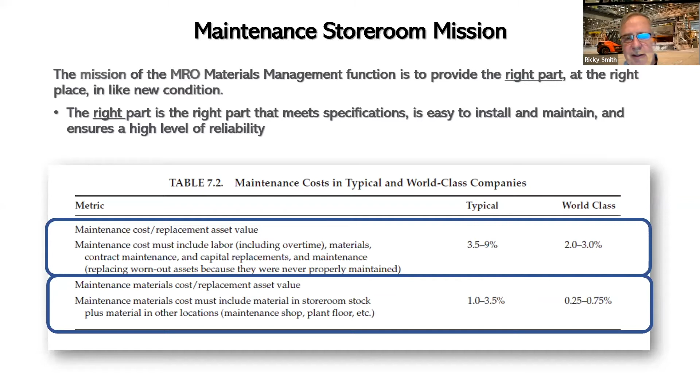We go to world class, it's 2 to 3%. So that means you're spending a huge amount of money if you're typical compared to world class. Okay. Now let's go to spare parts. Material cost as a percentage of replacement asset value, 1% to 3.5%. And look how low this one is, 0.25 to 0.75%. It's massive. It's a massive amount of difference.

So let's just talk about some of the symptoms of an ineffective storeroom. These pictures are actual pictures I took in a storeroom, not this week. The environment parts and material are kept in does not meet the requirements of the manufacturer. The manufacturer says a V-belt should never be hung straight down. It should be rolled up and stored on a shelf. So do any of you have that problem? Do your belts, your timing belts and your V-belts just drop down on a loop, hanging in the storeroom? Anybody?

We got a couple answers here. It says, pretty sure all of our warehouses have V-belts hanging on pegboards. Yeah. Every one of them, LOL. Read the manufacturer's recommendations. I know they want to sell you more belts and you're helping them out a lot, but we've got to look at what is best storage practice. They should be rolled up on a shelf.

Okay. The environment, you don't want the humidity too high, too low, too hot. It needs to be controlled. That's a big deal. Otherwise, belts will start to crack. But if you think about this, if I'm using belts a lot, maybe I'm not too worried about it. But if I start improving the reliability of my assets, then maybe I do need to do that.

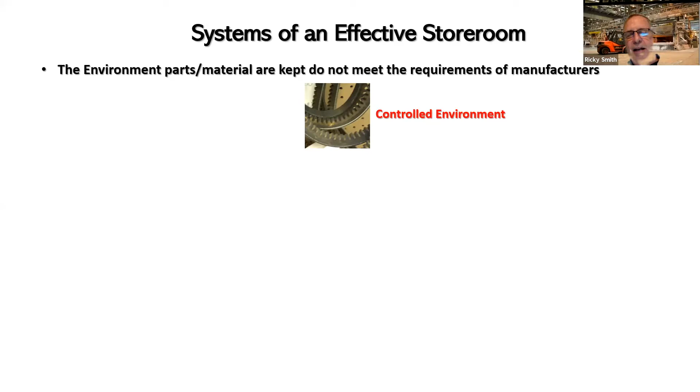Probably none of you have this. Used parts stored in the storeroom. It was a used motor. I took this picture too. The plant's used motor, it's the spare motor. How long do you think that motor will last? Somebody tell me. This actually was in a storeroom, not this week, but how long do you think this motor will last? And I'll tell you what, a new motor that's maintained should last 15 to 20 years. But how long would this motor last? Give me your best guess.

We have 1 to 2 months if you're lucky. Yeah. There might be times you put it in and it fails immediately. In this plant, what they did was send the motors out to be rebuilt. The smaller motors, once they got a new motor in, they got rid of the old ones. Now, how do you store a motor? A large horsepower motor, this is my recommendation. If you've got anything 25 horsepower and above, you should have vibration pads underneath it in the storeroom.

The reason for that is because the floor in all plants vibrates. So if it's vibrating like this, that bearing is going up and down. So the vibration pad softens that. But you need a PM in the storeroom. On large horsepower motors, a technician should go to the storeroom, or you could have the storeroom do it. Rotate the shaft 1 1/4 turns every 30 days. That means a PM comes up for the storeroom to rotate the shafts 1 1/4 turns. It can't be one turn, because if you go all the way around from 12 o'clock back to 12 o'clock, you might end up exactly where it was. You want to go past the 12 o'clock point.

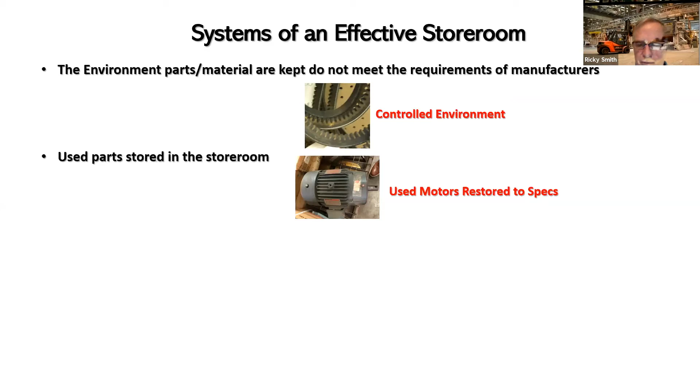Lack of inventory control. Same place you see these, we see this. So what we're doing is we've got a piece of paper, and when you check something out, make sure you write it up on our little clipboard there. Let me go back. Let me think. Let's see.

When I went to work at a company in 1980, this was a requirement. Our storeroom was not a death trap. Our storeroom was very much up to specification. Why? Because they didn't want to lose money. They didn't want parts and components and equipment sitting around that would not function. And that place was Alcoa Mount Holly, which is the world-class model.

This is the one thing you should take back from this. All parts must be charged to an asset. All parts. Okay, parts that have to do with just cleaning the shop or whatever, don't worry about that. But all parts for a machine have to be charged to an asset.

All right, I want everyone to answer this one. Do you agree or not? Doesn't mean you have, but do you agree or not? Everyone answer that question. We've got 17 on, so come on. 15 answers, sorry. We got one agree. Yes. Agree.

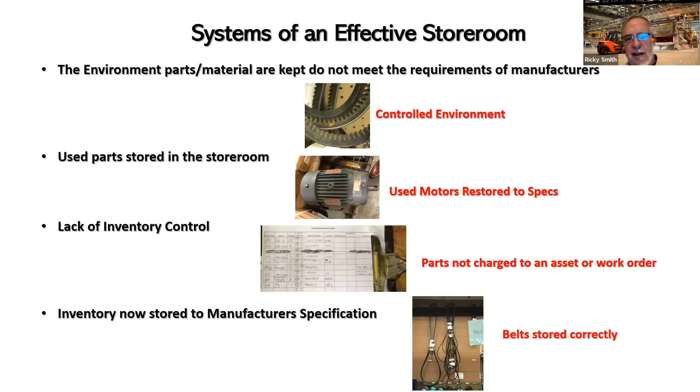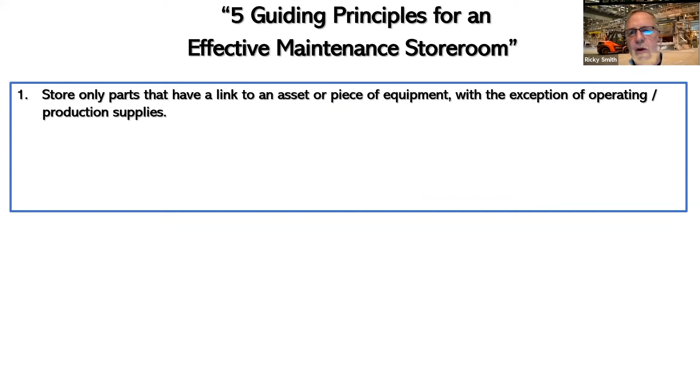And then inventory has to be stored to manufacturer specifications. Okay, not hanging V belts down like you see there. Five guiding principles for an effective storeroom. Pretty simple. Store only parts that have a link to an asset or piece of equipment, with the exception of operating and production supplies.

Promote physical security for your parts. Treat them as if that were your personal checkbook. Lock storeroom, card access. Now, one of the things I did with my storeroom when I was a maintenance manager was that I had a card key access. So what you would do is you punch your code in. You got a special code. You punch it in, and then when you opened the storeroom gate, a noise went off, and that means you had to go in and close the gate behind you very fast.

The reason for that, I didn't want vagrants going in the storeroom. You know who those people are. They're hanging out by the storeroom. So when someone goes in to check something out, they can go in and get the part they need because they're too lazy to write a work order and charge it to the asset. It doesn't make sense. Okay. I want physical security control. I want to make sure I know who's been in there, how long they've been in, and so on.

Now, one company I was working with, you'll probably be surprised at this one, decided to put a camera in the storeroom just so they can monitor who's going in the storeroom. It wasn't locked. They just wanted to know who went in the storeroom. And it was funny. One guy comes in with a paper bag over his head. He's got eyes cut out. He goes running in the storeroom. He grabs a fastener, picks it up, thumbs up, and runs out of the storeroom.

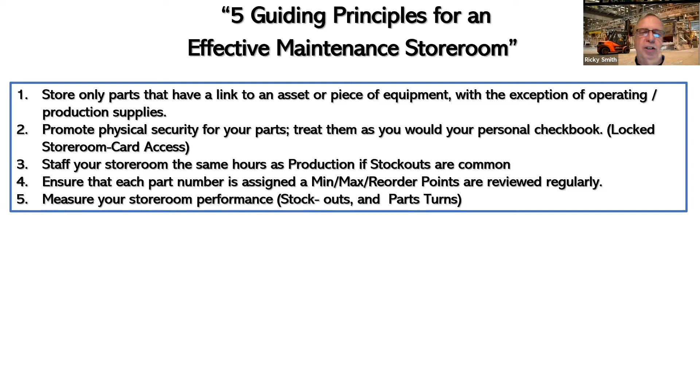So what are your expectations of an effective storeroom? Well, I guess it depends on who you are. What does maintenance say? We want to have the right part at the right time. Absolutely. What's production say? Want to have the right part at the right time. So here's the difference, okay?

So plant leadership, we want to have the lowest number or value of parts in stock. And I understand that. But you can't cut your way to reliability by cutting parts. You gotta measure the system, measure the amount of turns a part turns in the storeroom. And if it's turning a lot, you need to find out what the root cause of that is.

And maybe it's because we got a problem with equipment, or maybe we got the wrong part. Who knows? But we need a root cause analysis on it. Then we need to have an effective system to manage parts.

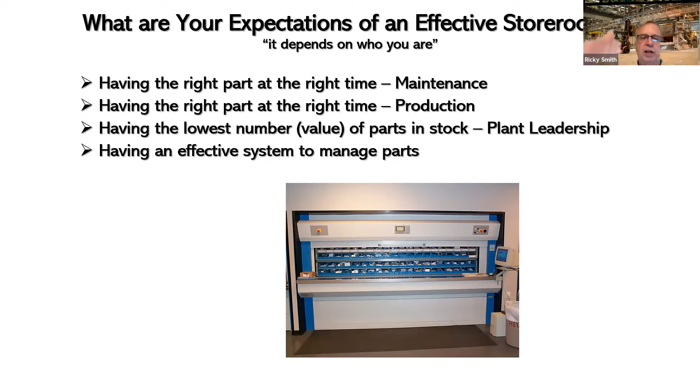Now, this one you see in front of you is similar to one I saw this week, where you actually use a card reader. You bring your card up and badge it, and then you type in the part number you need, and it brings it up on this elevated system. It's just a rotating system with certain parts in there.

So what's the objective of a maintenance storeroom? Provide the right part in like-new condition at the right time with the minimum amount of stock. Reactive organizations spend a lot of money buying parts, storing them in the storeroom when they don't really need all those parts if they had effective what?

What do I need in order to minimize the amount of parts I need in the storeroom? So I need proactive maintenance. I know that. But what is the one thing I could do to give me that? Anybody? Give me your thoughts on it. Anybody? We have one saying preventive maintenance scheduling, one saying PdM.

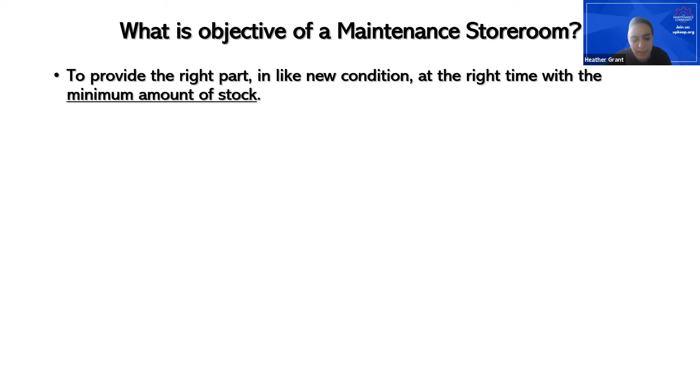Yeah, and really, you're right. It's planning and scheduling. If we plan and schedule the work, we don't have reactivity, which means we've got to have all these parts in the storeroom. If we plan the job, that means we've got the parts identified. We don't have to have it in the storeroom.

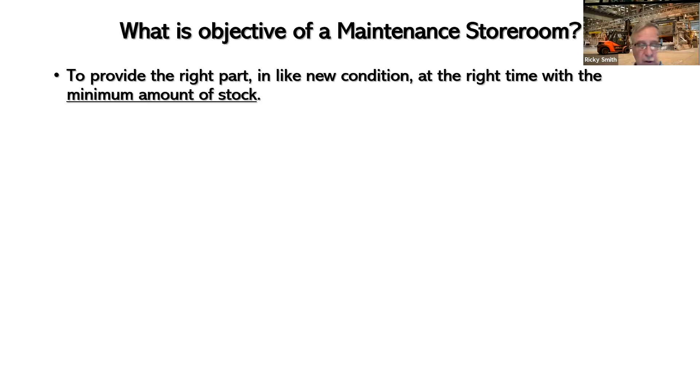If the time from when I order it to the time it comes in stock is enough time for me to have the job scheduled, then that's fine. If not, I need it in stock. Okay. But planning and scheduling, if you don't have effective planning and scheduling, all this storeroom modification is out to the wind. It doesn't work. You got to have proactive maintenance planning and scheduling.

So what's the minimum amount of stock that you have? I mean, it all depends on how fast the parts are turning, right? How many parts are being checked out in certain categories? A reactive maintenance organization is to have parts ready just in case. I was at a plant recently. Their storeroom was just massive with parts just in case.

But unfortunately, most of the parts that they had in the organization weren't in the storeroom. They were outside the storeroom in the maintenance shop. They had 4 or 5 maintenance shops. Every maintenance shop had their own hidden spares. And that's not good because a lot of them weren't being stored correctly and a lot of them were used parts. We need to consolidate; all our parts must be in the storeroom or in a secure cage for scheduled work.

Whereas what we do in scheduled work is the planner plans the job, the part is ordered or pulled out of stock, and then it goes into a secure location on the day that job is starting, like every day during the week. The maintenance supervisor opens the cage. Everybody's got a work order. There's a work order tag on whatever pallet or whatever part they need.

It's already in there. It's not in a storeroom. It's a separate cage. They go in there and they remove the parts, they match the work order to it, they grab it and they go do the job.

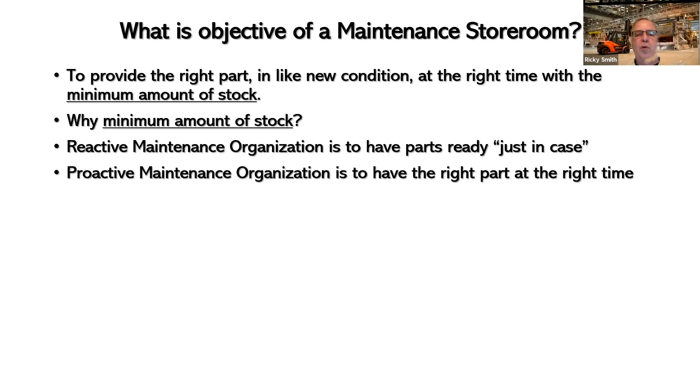Okay. Proactive maintenance is to have the right part at the right time. Reactive is to have parts ready just in case. Proactive organizations have the right part at the right time. So if we look at this, maintenance material costs as a percentage of replacement asset value, okay? So maintenance costs, including material in storeroom stock plus material in other locations, 1 to 3.5%. That's for a reactive organization.

0.25, you notice that the value just went down. The cost is much lower, 0.25 to 0.75% for a world-class organization. That's a big difference in money. That's a huge difference in money. So you're probably asking yourself, what is RAV?

RAV or ERV is the monetary value required to replace the production capability of the present assets in the plant, including production or process equipment, as well as utilities, support, and related assets. It is all your assets. And it says it should not be based on the insured value or depreciated value of the asset. It includes replacement value of the building and grounds, if the assets are maintained by the maintenance expenditures. It does not include value of real estate, only improvements.

Now, I have to tell you the way I do it, because getting this number is near impossible. If my plant were to blow up today and disappear and I had to put a new one there tomorrow, what would it cost? That's not realistic. The only place you can go to set a baseline is find out what the insured value of the plant is. Whatever the insured value, that's my baseline, and I'll go from there. I don't know if it's good or bad, but we'll start there. And that will help us start seeing if we're improving or not.

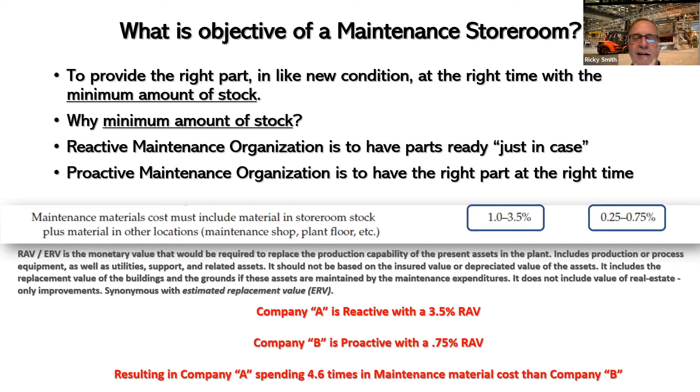Anybody, was this a shock to you? Come on, answer me. Yes or no? Yes. Yes, from myself and 2 yeses in the chat.

I tell you, when we start talking about this to management, it's real simple. It's all about the money. This is the international standard for how much money we have in stock because of how we operate. Now, understand how we can reduce this.

If you look at proactive companies, their RAV is very low. Replacement asset value is very low. It's because they have planning and scheduling in place, and it's highly functional. It's working great. People don't come to work dead on their feet every day or stressed out. They come to work smiling, have a good day. I'm ready to go because everything's here for the schedule.

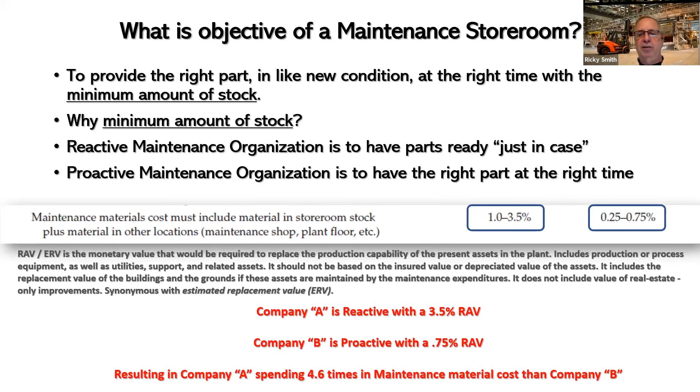So, steps to optimize your maintenance storeroom. Identify how much money the organization is losing because the storeroom is not effective. Just what I showed you before. How much money are we losing? Set a baseline. How much are we spending on overnight delivery, right? Overnight shipping costs. Vendors charging more for a part because we need it right now.

Okay, right now. So I knew this one guy I used to buy parts from. He'd always ask me, so how bad do you need it, Ricky? I need it real bad. I just asked you what the cost was. Why are you asking me that question? He's saying, I just want to know. No, he wants to know if he can mark it up. That's what he wants to know.

Production not operating to specification. We're down too often or we're not meeting production rate. Remember this: anytime in maintenance, it's all about production. We want them to run as much as they can run and make as much money as they can make, because then my job's secure, the plant's life is secure.

Measure your maintenance cost. As I mentioned before, it is a percentage of replacement asset value against a known standard. If you have access to your comptroller or the financial people, ask them, what is it?

I was at a plant this week. I just happened to talk to the very senior guy in the corporation who was there, and he just happened to ask me, what do you think we need to do first? And this was the first thing we talked about. He said, I'm going to get that number and I'll get it to you.

Post this information for all to see and keep it updated weekly. We've got to keep people updated because costs, I have to tell you, if we start moving proactive, costs do go up. I'm just being honest with you. It does, because you've got to invest.